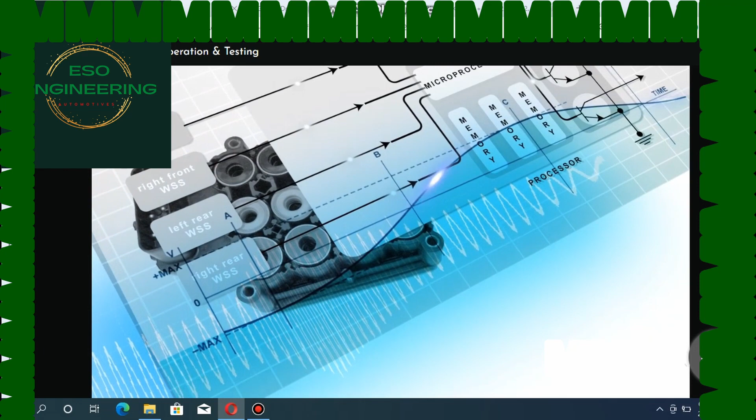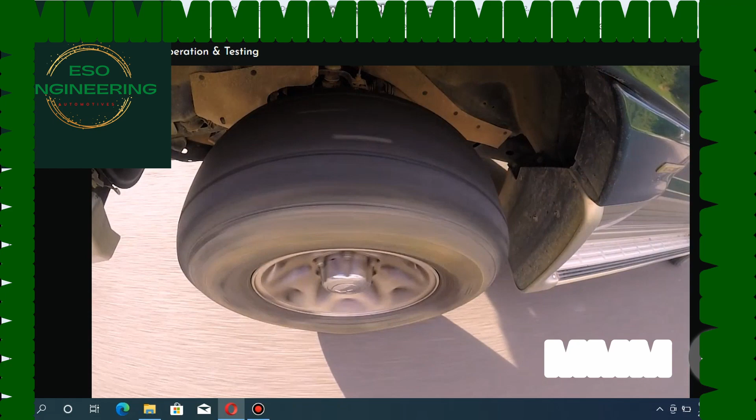For many years, a magnetic induction sensor supplied the ABS control module with adequate data for wheel or vehicle speed. These are simple and reliable analogue sensors that generate waveforms at a frequency proportional to the wheel's rotational speed. A wheel turning at low speed produces a low frequency signal. As the wheel speed increases, so does the signal frequency.

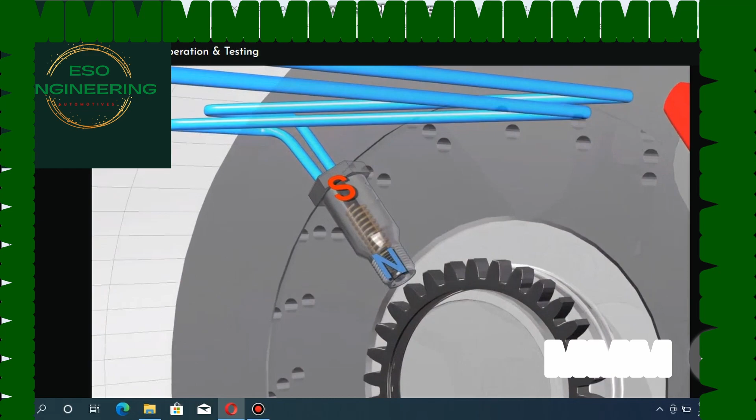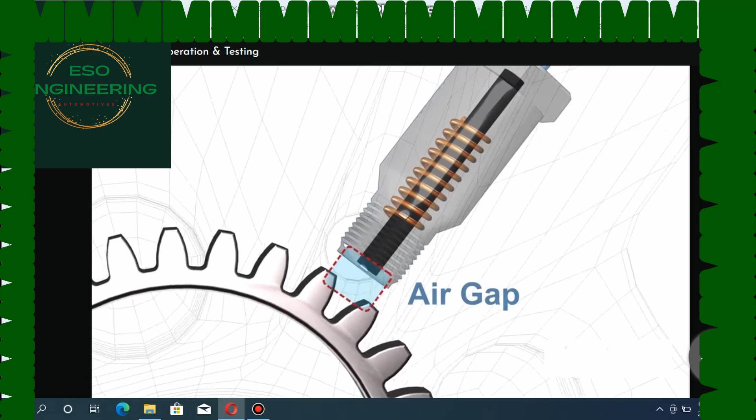The sensor works by using a stator with a central permanent magnet and a soft iron core surrounded by an induction winding. The stator is positioned so that it has a very small clearance or air gap between the stator pole and a toothed rotor or tone wheel.

As the tone wheel rotates, the air gap between the pole piece and the teeth changes. As this occurs, the magnetic field or flux from the permanent magnet within the sensor will expand and contract in time with the approaching and receding tooth.

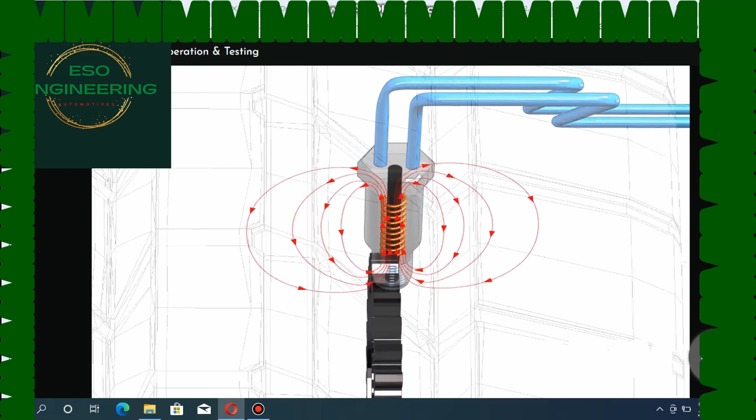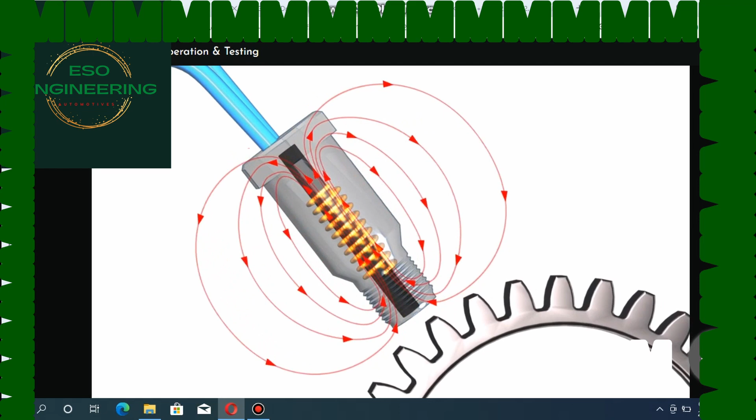The movement of the flux across the stator windings induces current flow in the stator circuit. The direction and size of the current flow depends entirely on the speed of the rotating tone wheel and whether a tooth is approaching or passing the stator.

Let's slow this down a bit and look at each section of the waveform. With no movement of the tone wheel and the stator directly over a valley, there is no movement of the flux, so no voltage is produced.

But as I rotate the tone wheel forward, the tooth approaches the stator. This influences the flux and causes it to move across the stator windings. A positive current is induced in the windings and flows in the circuit. This current and associated voltage will continue to build until the tooth is aligned with the stator pole.

At this point, the magnetic flux is contracted as far as the tooth influence will allow, so movement of the flux ends. As there is no movement, current flow ceases and the voltage drops to zero.

When the tooth moves past the stator, the flux expands once again and current flow is induced in the winding. This time, current flow is in the opposite direction and the polarity of the voltage is now said to be negative. Since polarity changes every time a tooth approaches and leaves the stator, the voltage and current flow in the circuit will alternate.

It's the frequency of this voltage change that's used by the control unit to calculate wheel speed.

Testing these sensors is relatively easy. We can use a multimeter set on ohms to check the resistance, or set on AC volts to check the output.

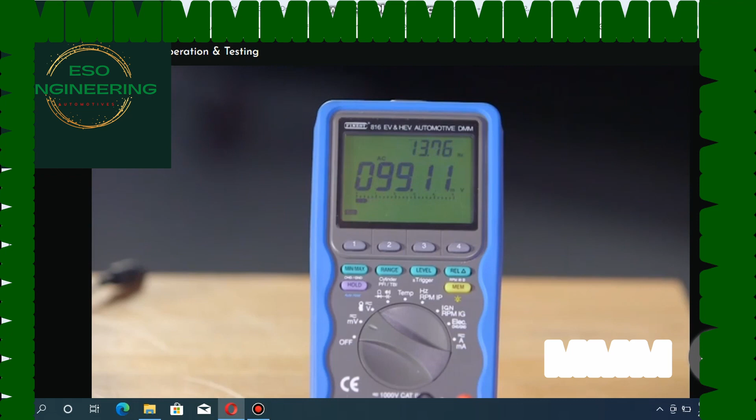My preference is an oscilloscope, as it gives me a complete picture of the sensor's ability to produce a clean analogue signal. Wheel speed sensor DTCs caused by opens, shorts or grounds can be easily checked with the multimeter, but any fault codes that relate to erratic operation, incorrect frequency or signal not plausible should always be checked with an oscilloscope. These codes are generally not caused by an electrical fault, but are logged because the control module doesn't recognise the signal pattern from the wheel speed sensor.

The actual faults are generally mechanical in nature. Let's look at some of these now.

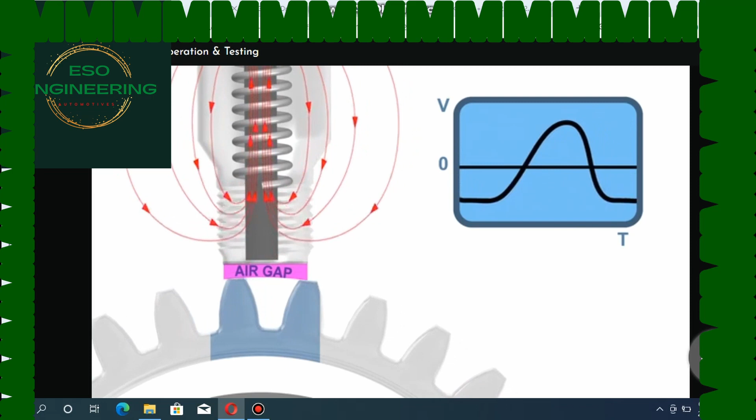The air gap between the stator pole and the tone wheel is the most important place to start your checks when diagnosing erratic signal fault codes. An air gap that is too large will not deflect the magnetic flux correctly, so no correct signal will be produced.

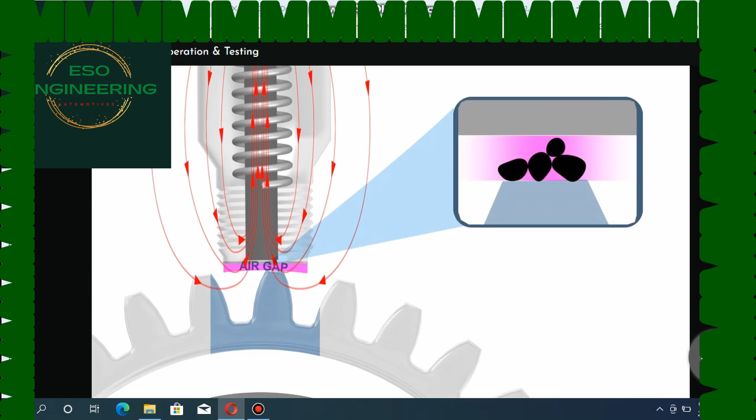An air gap that is too small may cause debris to become lodged between the tone wheel and the stator pole, causing damage due to contact of the sensor and tone wheel.

An incorrectly mounted sensor is not the only reason the air gap will change. A loose wheel bearing, hub or axle can cause the air gap to change when under load. Be careful when checking these air gaps with the wheel suspended, as the air gap can vary quite a lot between loaded and unloaded suspension.

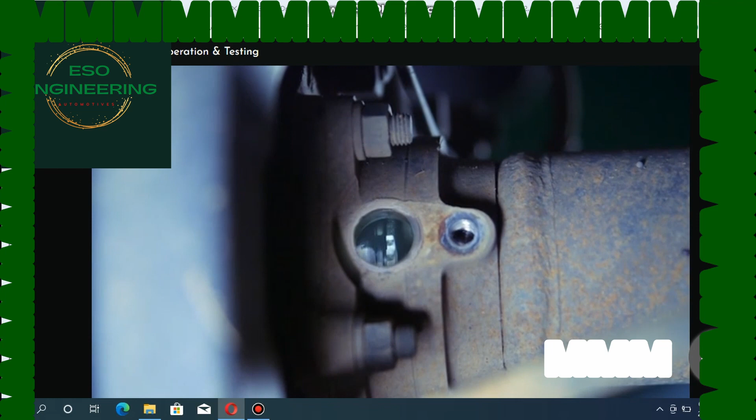While inspecting the air gap, be sure to check the tone wheel for damage, security, and foreign debris in the teeth.

Okay, if the mechanical side of the system checks out, connect the oscilloscope across the wheel speed sensor terminals. Spin the wheel and watch the trace. A correct signal should cycle between negative and positive volts, and the frequency of the shift should be proportional to the speed of the wheel.

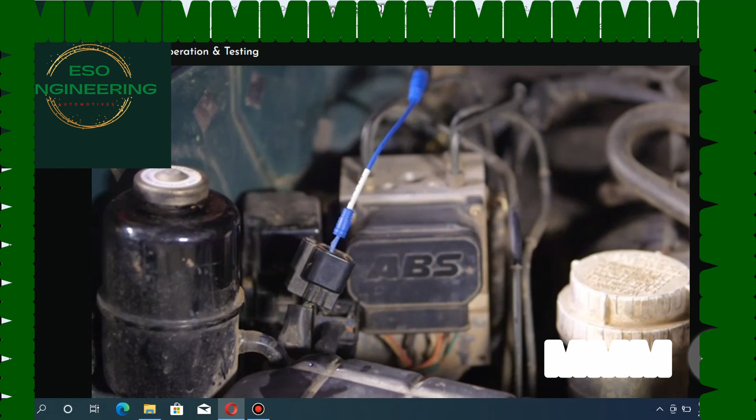Something I do to help my diagnosis is to connect a second channel of the oscilloscope to the ABS control module. Because these sensors are in effect signal generators, the ignition should remain off and the ABS module can be disconnected for this test. Connect the second channel to the same signal wires from the wheel, but at the module end of the harness. Rotate the wheel and watch the scope.

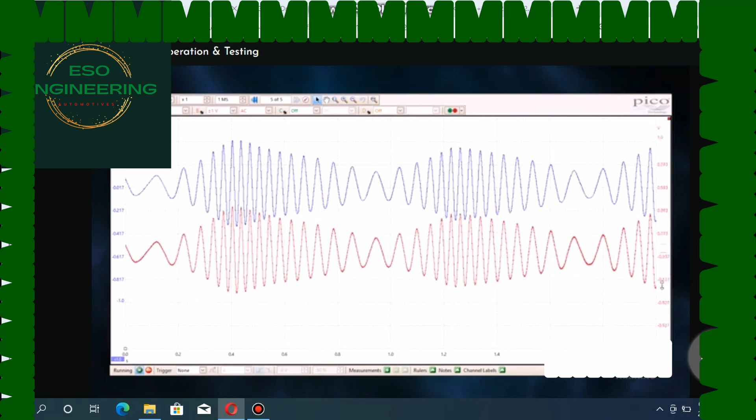With the patterns overlaid, the trace should be identical. If there are any inconsistencies between the two, then there is a fault in the harness.

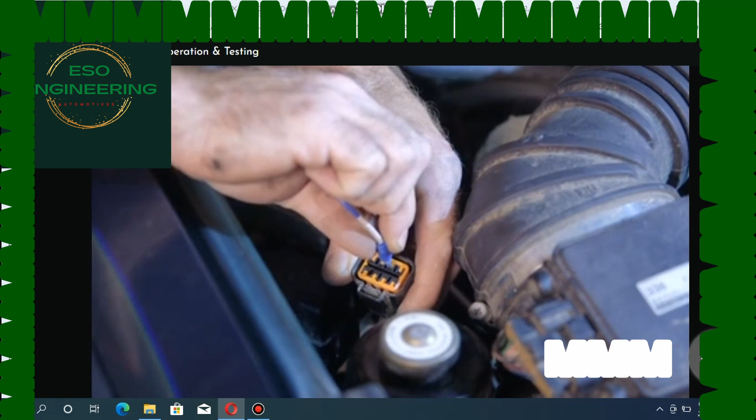Remember to check for terminal tension or any corrosion at the module connector, as either of these may cause erratic signal performance or erratic DTCs. If you have proved the sensor, harness, tone wheel and air gap to be okay, then the only possible fault can be the ABS control module. These old inductive systems have now been phased out.

Their replacements have a faster response time. We call these magnetoresistive or active wheel speed sensors. The reason for the change is the widespread adoption of electronic stability control in new vehicles.

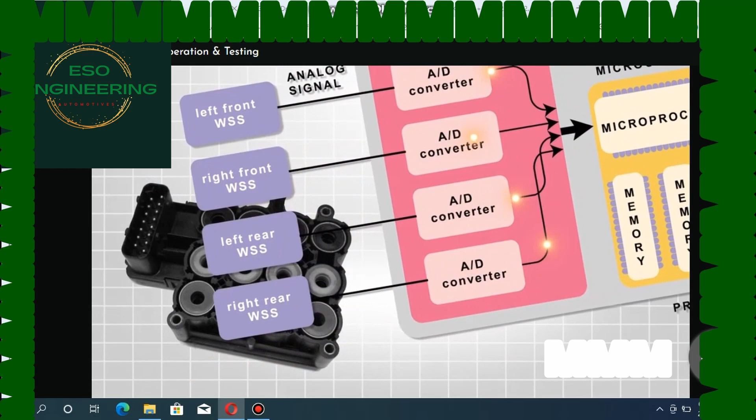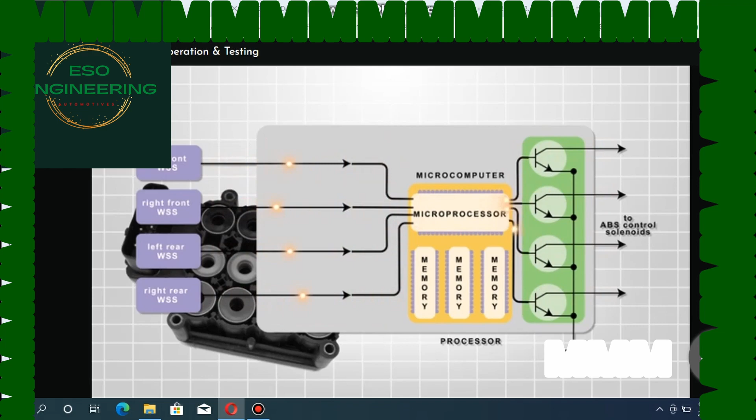ESP requires very fast signal interpretation to be effective. As active wheel speed sensors are digital in nature, an analog to digital converter within the control module is no longer required. Without the converter, the signals can be processed and acted on much faster.

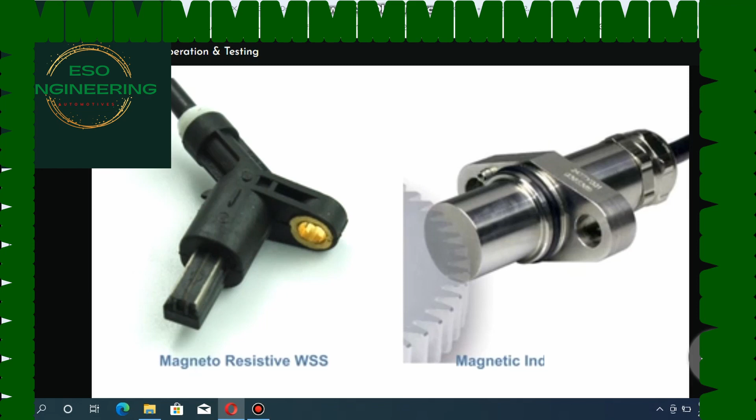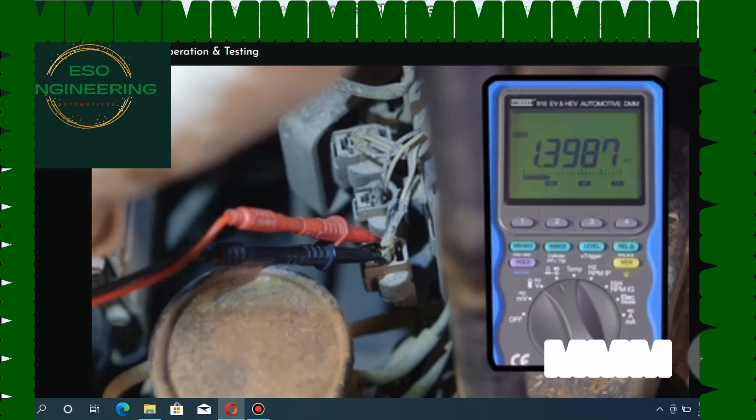Active or magnetoresistive sensors look very similar to an inductive type. They have two terminals and are influenced by a moving magnetic field. But in operation, they're extremely different. The resistance value of an active wheel speed sensor is rated in megohms, whereas an inductive sensor's resistance value is much lower.

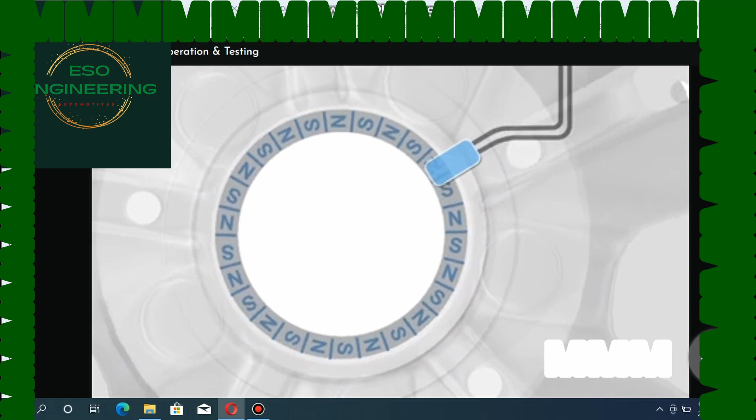This is because the stator in the active sensor is actually a magnetoresistive element. A reference voltage and ground are supplied to the sensor from the control module.

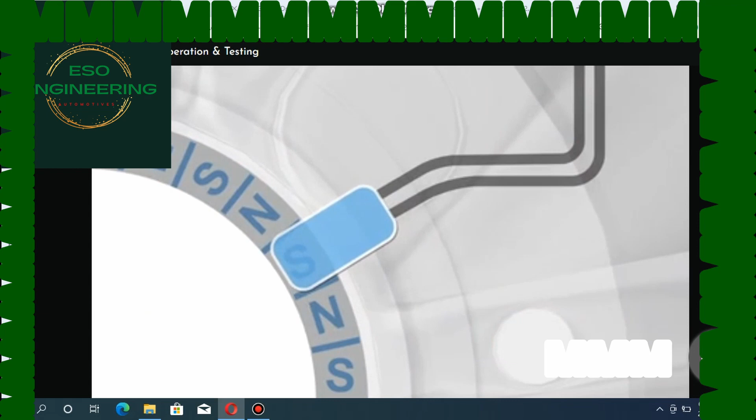These systems don't have a tone wheel. Instead, a multi-pole encoder ring is used. This encoder ring is designed as a multi-pole magnetic field. The segments are fixed alternatively north and south around the circumference of the ring. The encoder is sometimes formed as part of the wheel bearing seal, so it will rotate with wheel movement.

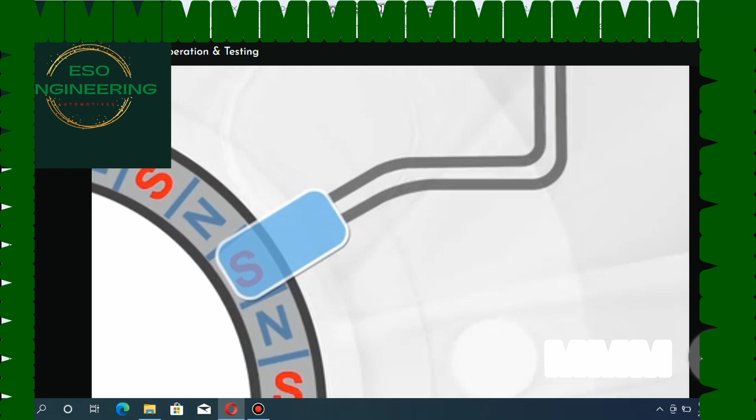The sensor assembly is mounted perpendicular to the encoder ring with a very small air gap. With the wheel stationary, one of the magnetic poles will always be in close proximity to the sensor. The magnetic flux from this pole will alter the resistance of the sensing element. The current flow through the sensor at this point will be about 7 milliamps.

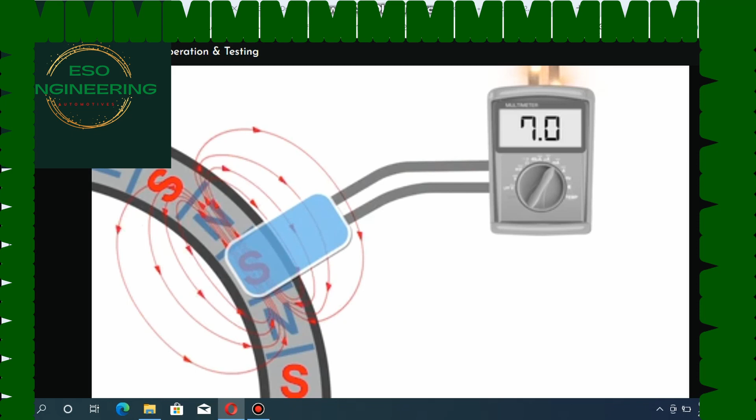The control unit sees this as a fixed voltage. This voltage is assigned as signal low.

When the wheel begins to turn, the next segment of the encoder ring influences the sensing element, changing its internal resistance. The current flow through the sensor will now be around the 14 milliamp area.

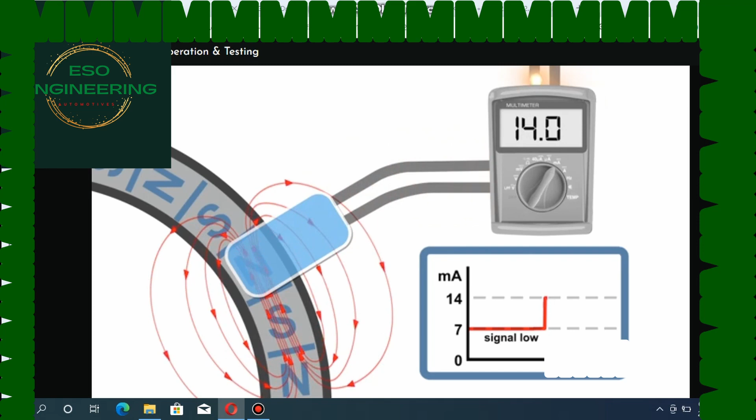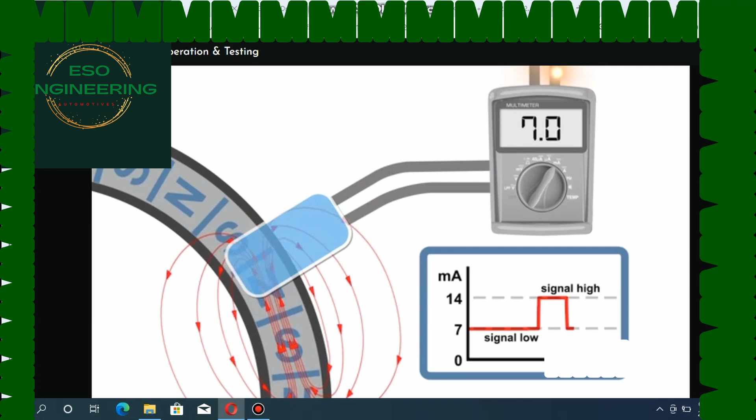The control unit sees this as a change in the circuit voltage drop and is programmed to recognise this as a signal high. As the wheel continues to turn, the change in current flow through the sensor is interpreted as an alternating voltage from low to high, or off and on. This is a digital signal. The speed of the change, or the frequency of the signal, is directly proportional to the wheel speed.

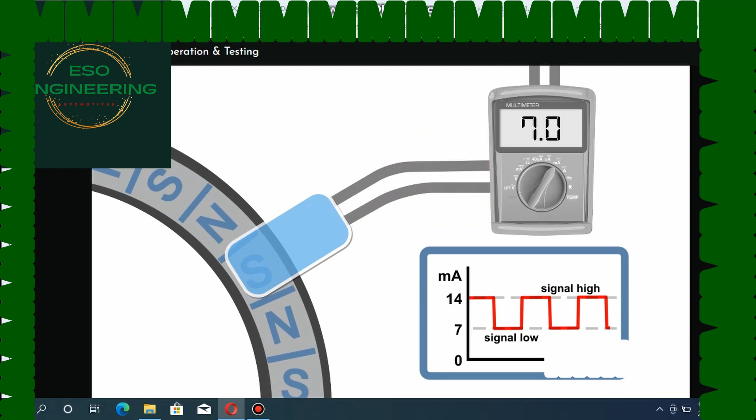This is a digital signal. The speed of the change, or the frequency of the signal, is directly proportional to the wheel speed.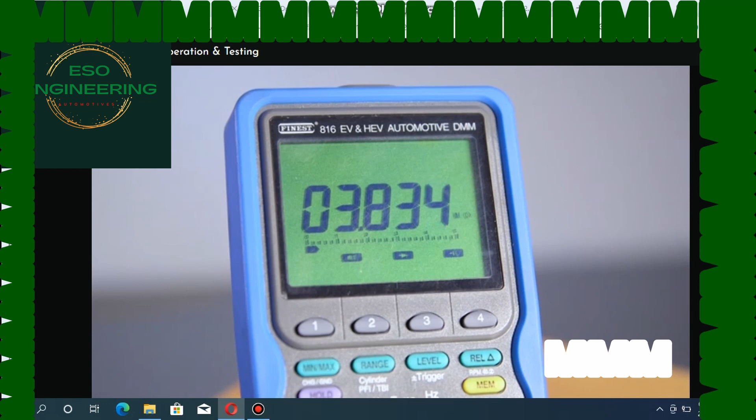Unfortunately, we can't test these sensors the same as an inductive type. Because the sensor uses a magnetoresistive element, any resistance value of the sensor is too high to use accurately. But a multimeter can still be used.

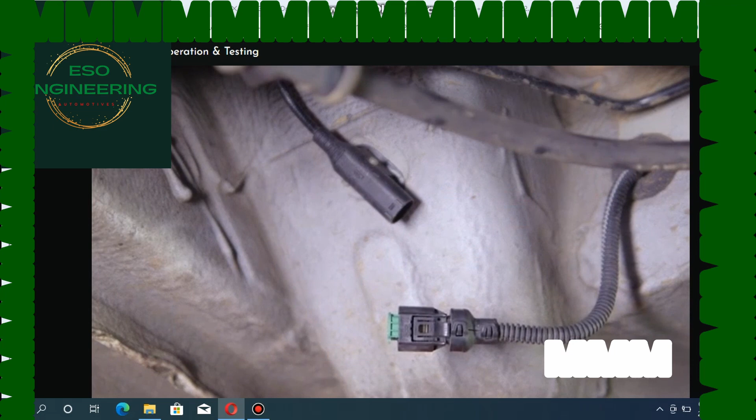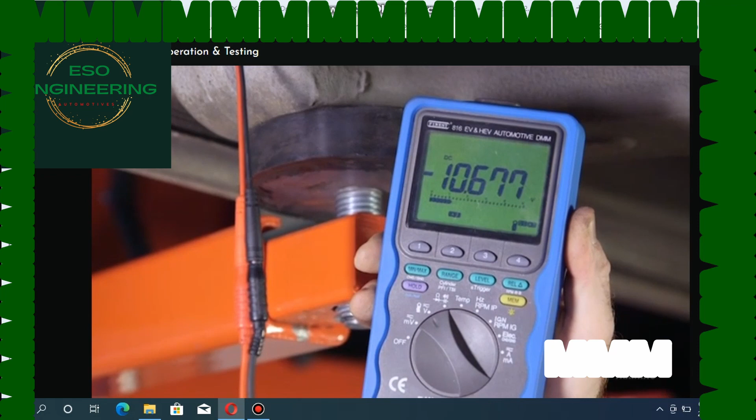Start by disconnecting the suspect sensor and turning the ignition on. Check for the manufacturer's specified voltage across the two terminals in the harness connector. If you don't have the correct reading here, you probably have DTCs relating to circuit shorts, opens, or excess resistance. Diagnose and repair these first.

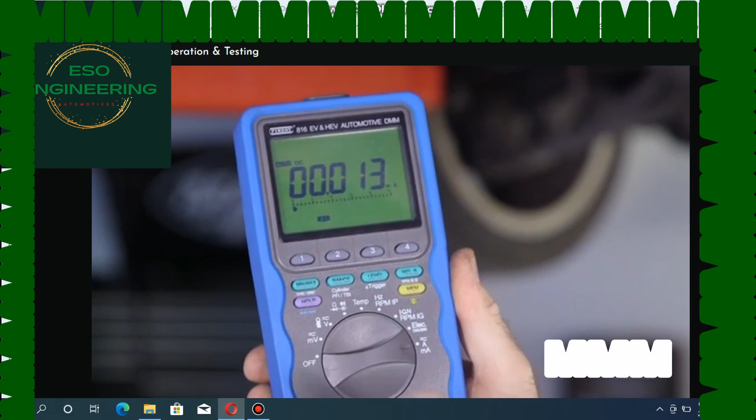If the meter displayed the expected value, disconnect the leads and switch the meter to amps DC. Connect the meter in series with the sensor. It doesn't matter which circuit you're connected to, the only difference will be the direction of current flow through the meter. You'll want to select a fairly low current scale on the meter.

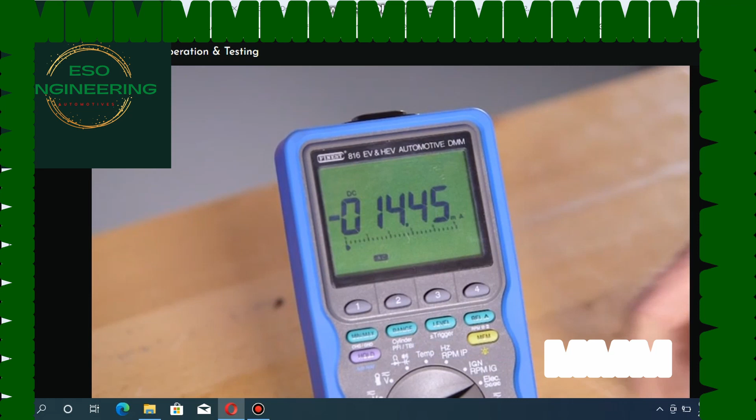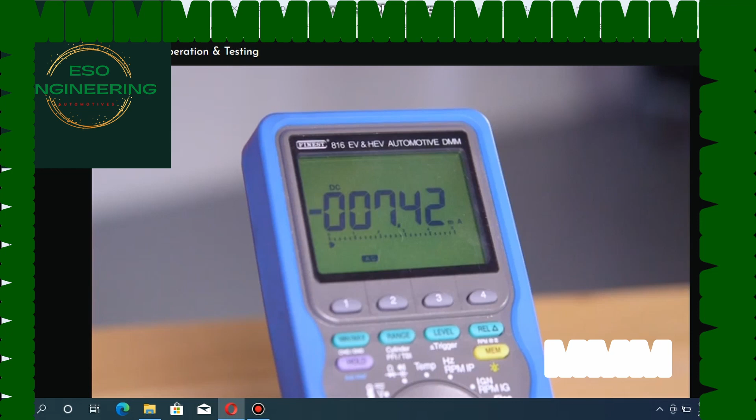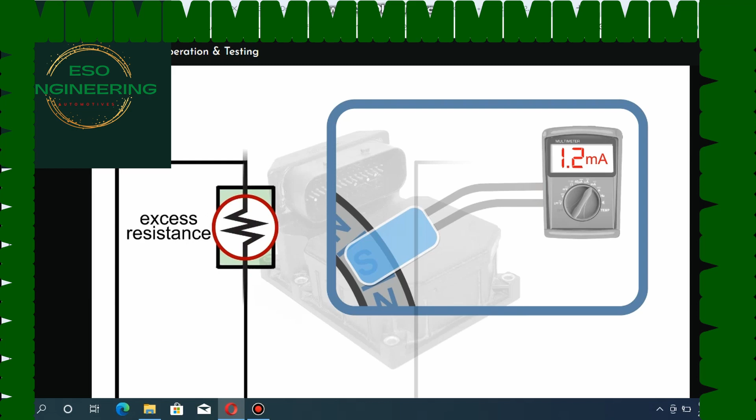Now rotate the wheel at a steady speed. The meter should alternate between 7 and 14 milliamps. When there is no rotation of the wheel, the current draw should sit on either 7 or 14 milliamps. If the current flow is much lower than 7 milliamps and the voltage measured at the connector was correct, then excess circuit resistance in the sensor will be to blame.

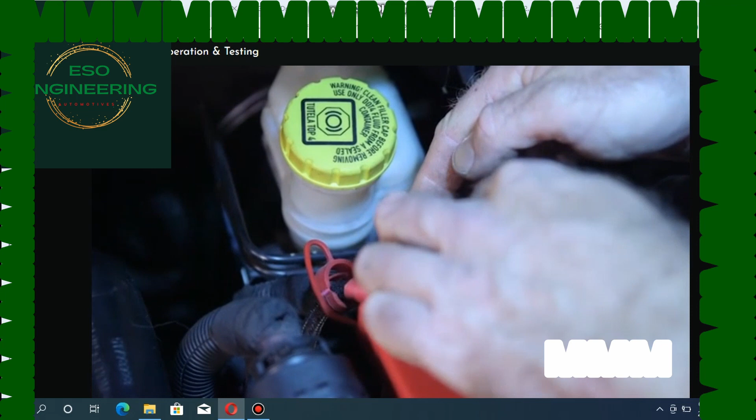But what does it mean if the current value is fixed on the meter and the wheel's still turning? Let's look at these signals again, but this time using an oscilloscope. I'm going to back probe the high and low reference circuits of the control module with the scope. I'll need a fairly small voltage scale to see the shift between high and low.

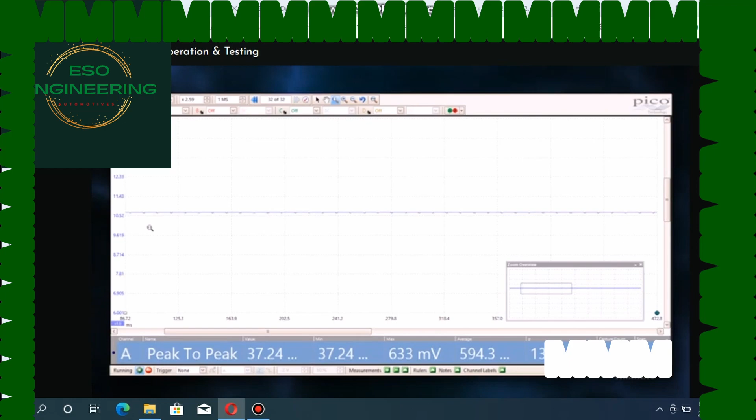If I rotate the wheel, a square wave pattern will be seen. As soon as I stop the wheel rotation, the voltage will hold steady due to no influence of the encoder ring. As before, I am rotating the wheel, but the trace signal is fixed. There is no square wave pattern.

The scope's giving us similar information to the multimeter, but in greater detail. From this, we can conclude that the electrical circuit is functioning correctly, as there is current flow in the circuit, but there is no magnetic field rotation to change the resistance value of the sensor.

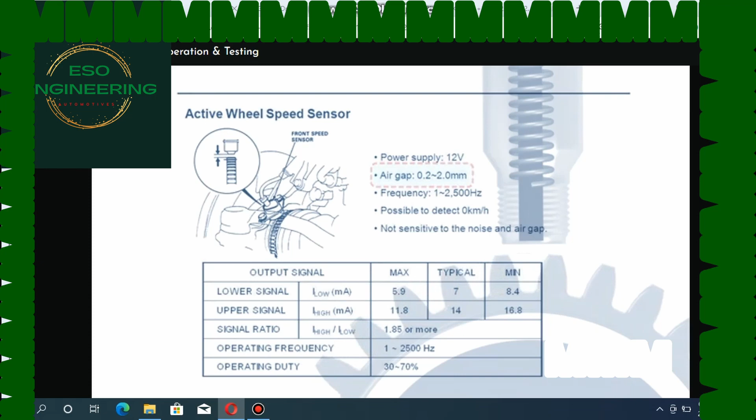A mechanical problem is what we should be looking for. Check the sensor for any debris, rust, or corrosion that may affect or interrupt the magnetic field. Check the air gap and compare with the manufacturer's specifications. If these are okay, check for any wheel bearing play that may affect the air gap. Check for any physical damage to the sensor and check for any water intrusion into the sensor harness.

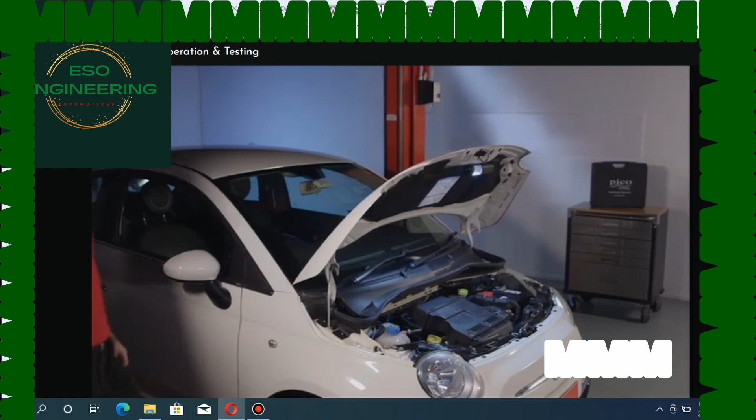It might be worth asking if the vehicle's had any repair work done. Has an incorrect wheel bearing been fitted? Has a correct wheel bearing been fitted incorrectly?

Diagnosing an active or inductive wheel speed sensor fault is not complicated once you understand how it works. Thanks for watching.